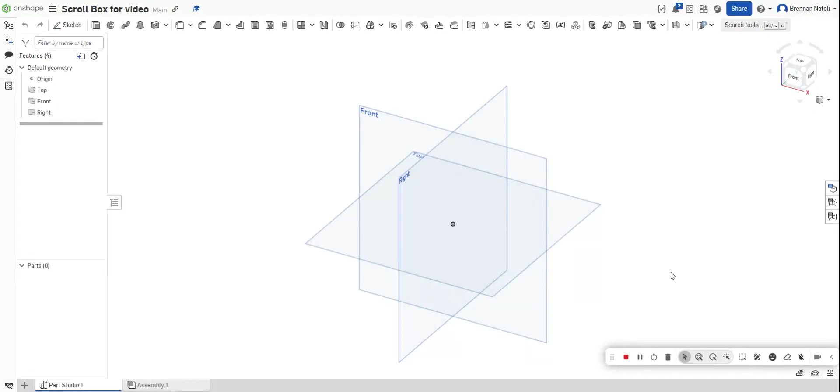So if we go into our Part Studio, here. I'm going to click Top View, N on my keyboard to create a normal view, so I'm looking directly on that. And remember, I don't have to keep everything in this blue space, this goes on for infinity. I'm going to create a sketch, so I click Sketch. What plane? I'm going to click the top plane.

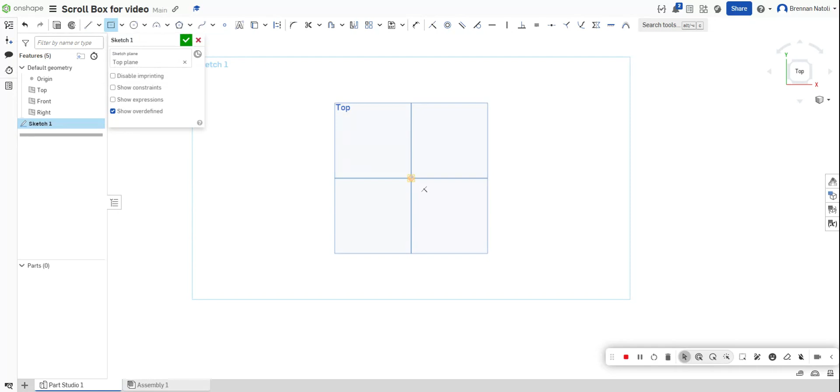Now I'm going to use the rectangle. When you click rectangle, make sure it's a center point rectangle. We're going to draw off the center, it's just easier to do that. So I click center point rectangle. Now if I click the center, drag up, click once.

I don't have to hover over these numbers. You see here where it says 6.47, it's a white box because it's asking you to input numbers. You don't have to click that. So what that's asking is for that measurement, and the measurement is 4.75. So I type in that, click enter, and then up here, if this box is white, it's asking me to put in 4.75 again.

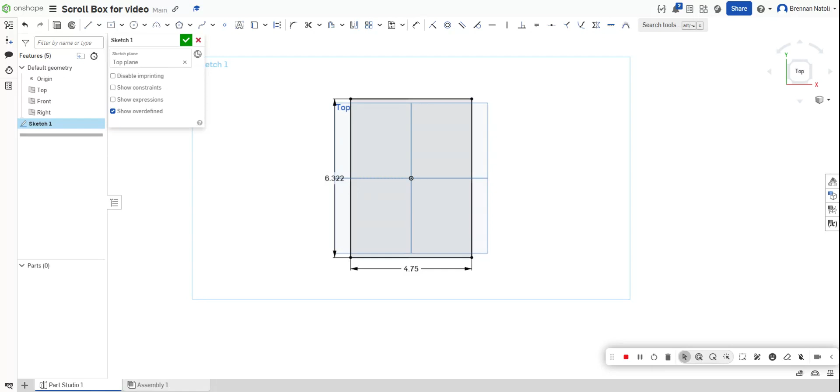Now, if you accidentally hit enter, not the end of the world. Just see my cursor still has that crosshair. Hit escape on your keyboard to break that. So you have a normal white cursor, and you can click that, double click it, and you can manually change that to 4.75, because if I'm referencing my drawing here, this is 4 3/4 by 4 3/4.

So 4 3/4 wide by 4 3/4 wide. Great. The next thing you want to create is that radius. So if I look at my drawing, we have a radius, inside radius, which we'll worry about after, but an outside radius as well, both 1/2 inch.

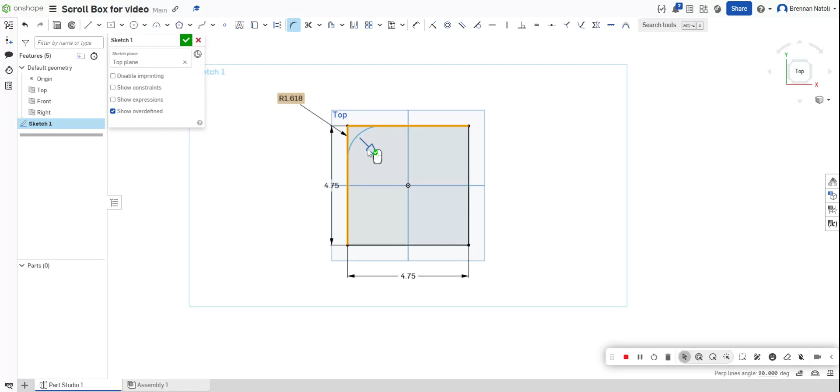Easy enough, I click the radius. It's not called radius, it's called a fillet. If you can't find it, you can type it in the search bar, but fillet, sketch fillet, I click that once, and you'll see I can click the two corners I want to add the fillet to. I can manually drag it out, but what I do is I just click it again, and then I can tell it what radius I want this to be. I want this to be 1/2 inch.

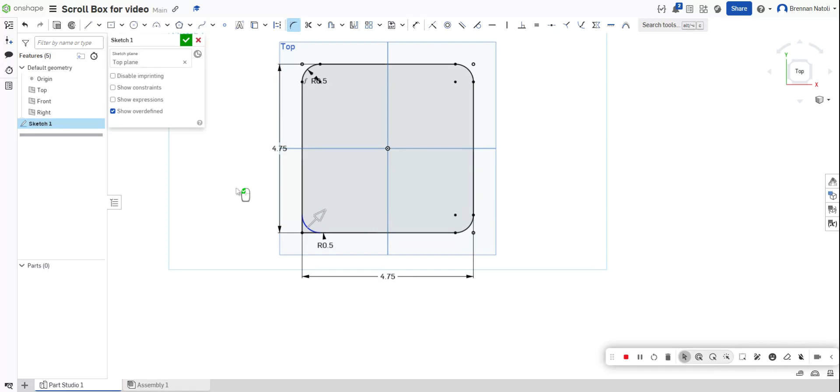Great. Once I have one selected, all I need to do, I'm still in this command, I'm just going to click the other corners. The radius is already set at 0.5. Click again, hit enter, and I can go around and I have the outside.

Now if you look at our drawing, we have this inside cut out, right? So we need what's called an offset. So we're going to offset this outside profile by 3/8 of an inch. You see that this dimension here that I'm highlighting is the wall, it's 3/8 of an inch. So we don't have to redraw this.

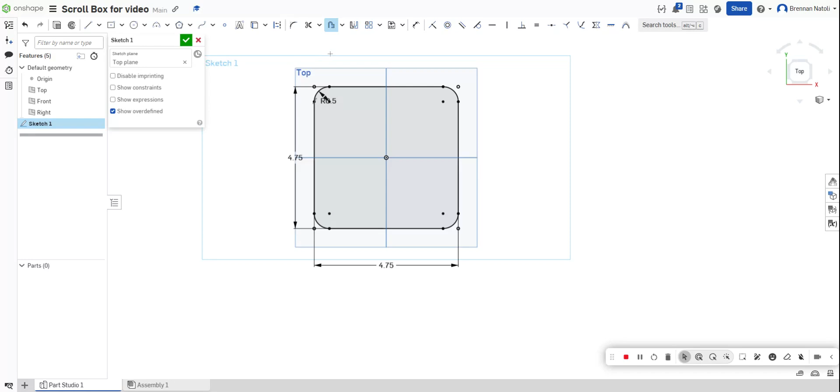We could, but what's easier, if you're still in the sketch, there's a tool up here called offset. If you click offset, what this will allow you to do is click all the lines. You can see as I click, I'm clicking all the lines that I want to offset. And the arrow, it's pointing 0.25 inches outside, but we want to click that arrow once, we'll change the direction. You see it's asking to accept that, I accept that once, and now what I'll do is come back, hit escape to break the cursor.

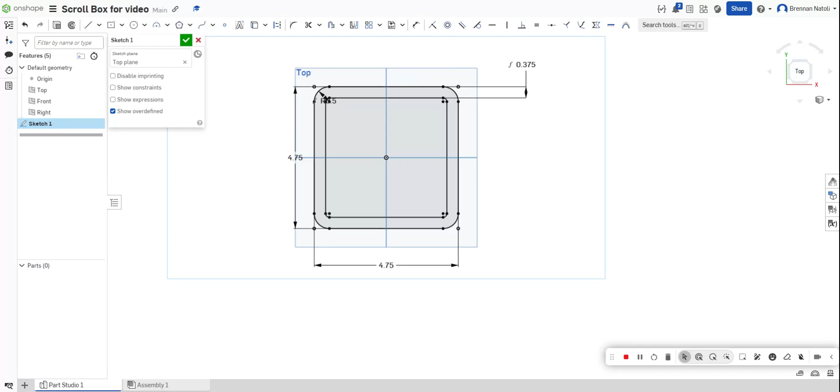If I click this dimension here, 0.25, we're going to change that to 3/8. And you see my offset changed.

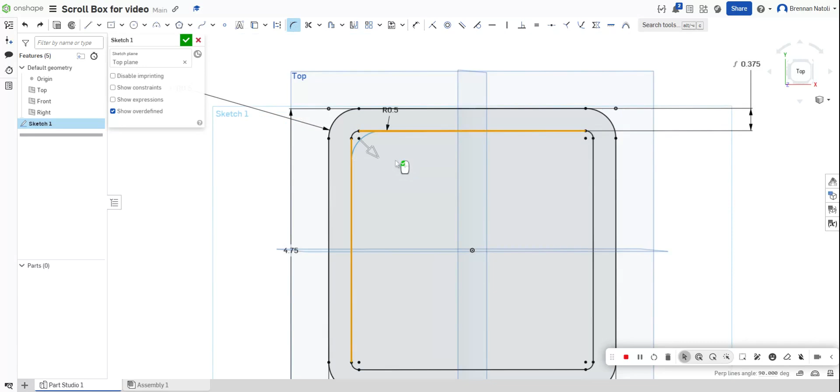After you do that, you notice the radius doesn't always transfer perfectly, so you'll have to manually change this radius. Go up to sketch fillet again, click the lines you want to add the radius to, accept it, go around all the corners again, and you'll notice it leaves that extra line there.

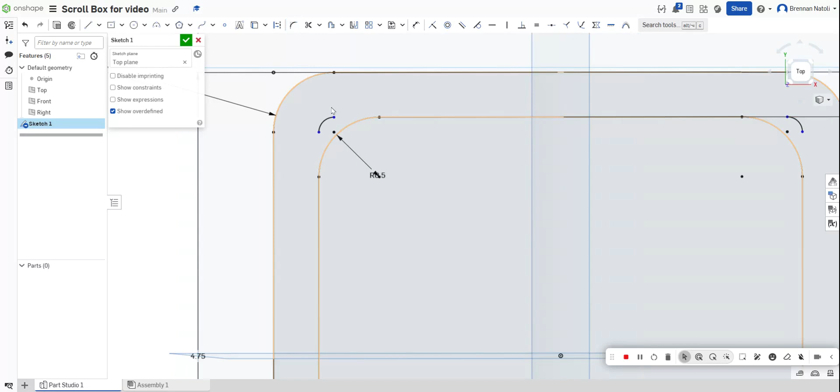Remember, to get to the normal cursor, your cursor shouldn't look like these crosshairs. To break the command, hit escape on your keyboard. Your cursor should look like this, and what you can do is go back and delete those extra radius lines. Great, we now have our sketch.

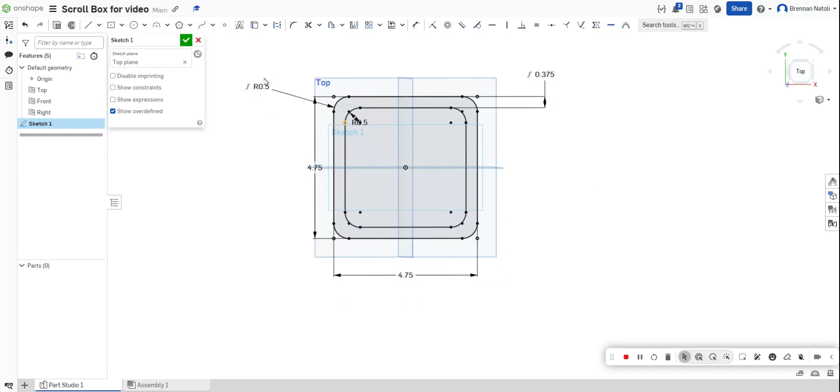So basically we just created, if you look at our drawing, this top view here, referencing all these. Now we need to extrude this, since it's still only 2D, to make it 3D. So I'll name this sketch, body, accept it. If I rotate around, you'll see it's still not complete. So what you do is click extrude.

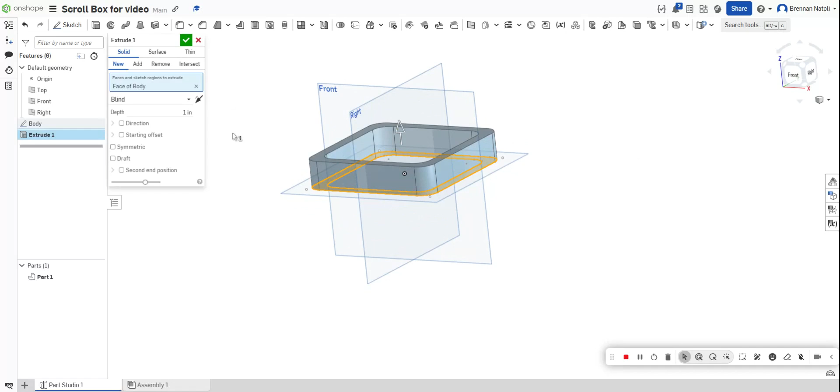Now all I need to extrude is I'm going to select the outside and the depth. If I reference my drawing, what's the depth? It's 1.5 inches, so I'm referencing my drawing. 1.5. I'm going to name it - it's good to name the extrusion. So this is body. Green check mark, and great, I have the body of this.

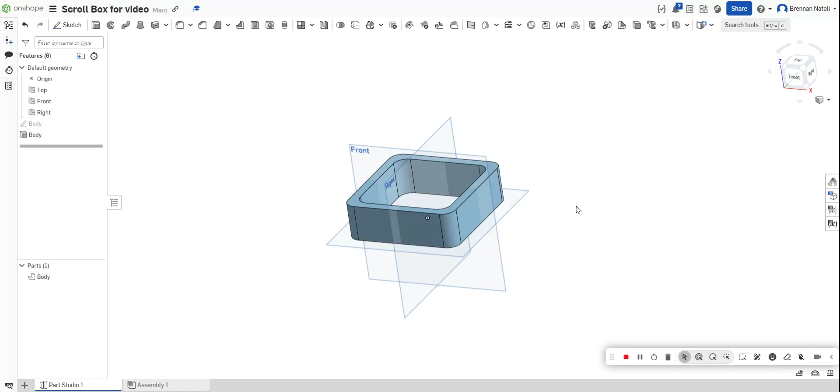Now from this, we can work and build off of this. It's pretty straightforward - we're going to reference the other drawings and build off of this first part. You can see now that we have a sketch, an extrusion, down here where it says parts, we have part 1. We'll rename this body. And that's our initial part. Great. From here, we're going to start and draw our top.

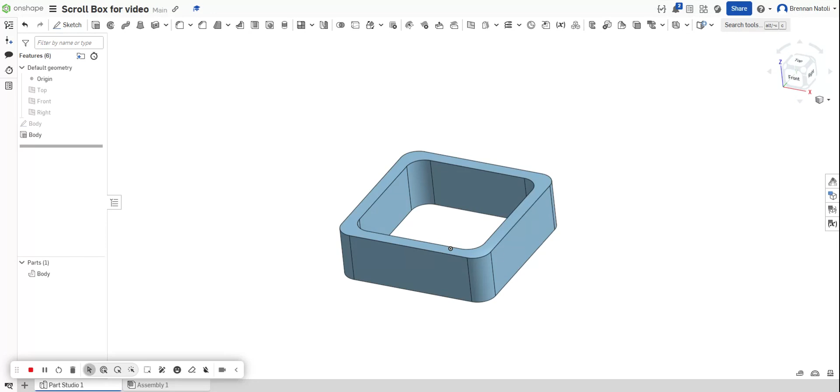So we'll go here, we'll start a new sketch. I'm going to click this surface here, the top of the body of the box. Click N on my keyboard, so I'm looking directly on the top. And then I will click Sketch.

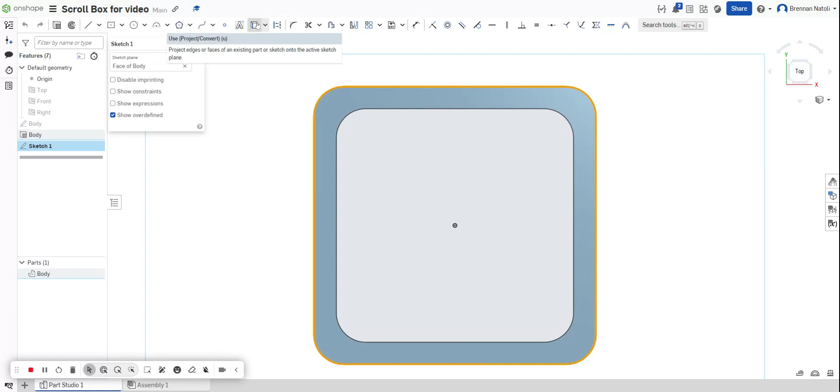So we're going to use a new tool here, called the Use and Offset tool. The first thing we're going to do is the Use tool - it looks like a square with one side highlighted blue. This allows you to click the outside perimeter, so we're not going to draw a new square. We're going to click the lines, and they'll be selected when they turn orange. Then I'll click the Use/project/convert icon, and you'll see those turn black.

If I hide, now what you can do, you can hide your body. Over here on the left-hand side where my cursor is blinking, there's a little eye icon if you hover over it. If you click that, it will hide the body. So now you can just reference your sketch that you're drawing now.

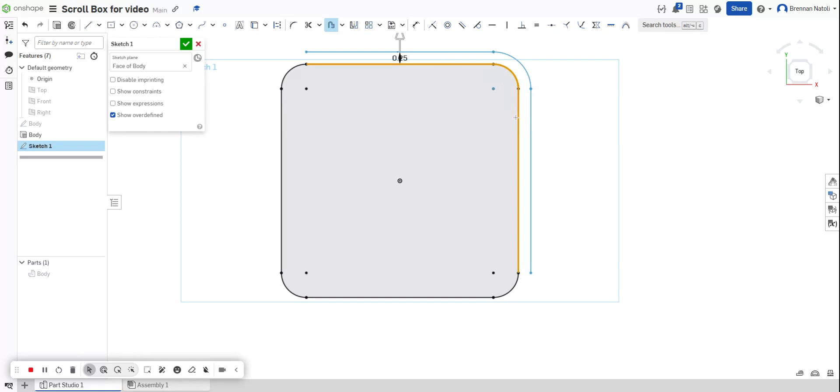That's great. If you reference our drawing, we have this rectangle on the inside, right? That is 7/16 from the outside, so we're going to use the offset tool. There's an icon here called offset, or O on your keyboard. If you select this, you should be able to click each of these lines, and you'll see as I select, lines will build around this.

And we want to change the direction - we want to offset inside, so I'm going to just move the arrow in. If I move my cursor, you see how it has that green check mark next to the left click, so I'll click. That gets accepted, but we want to change this number here, so make sure my cursor is still in the offset command because I have the crosshairs. So hit escape on your keyboard.

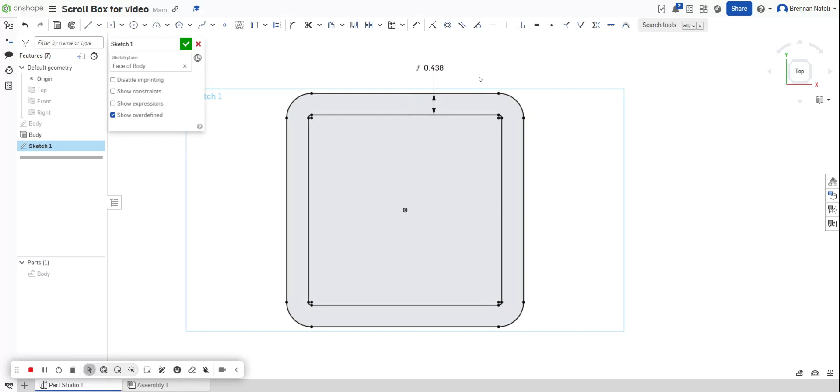Now this dimension here, if I double click this, we're going to change this to 7/16 and hit enter. Great, it looks good. The only thing we need to change is the radius.

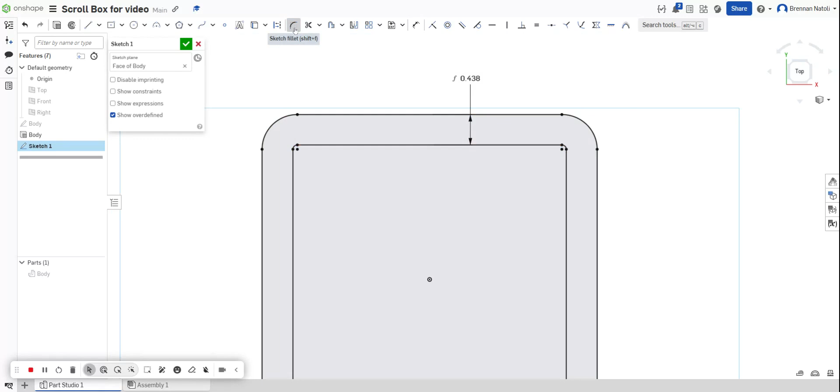So what we're going to do is use the fillet command - this is going to give that a radius. I'm going to click the fillet command, Shift F on your keyboard, and click each of the corners and click once. Mine is already set to 0.5 - if yours is not, change this dimension to 0.5. You're going to go around, I'm still in the fillet command, my cursor has the crosshairs, it's still selected blue up at the toolbar, and I'll go around and make all these corners have a radius of 1/2 inch.

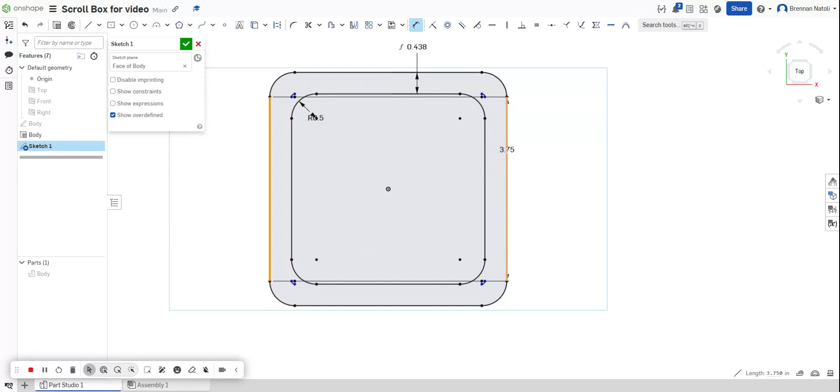So there's our sketch, right? We just made it, we can dimension this - we don't need to dimension this because you see the lines are black, that means they're fully defined. So if I try to, nothing will happen. It's referencing the body that we drew before, but this looks just like the drawing here.

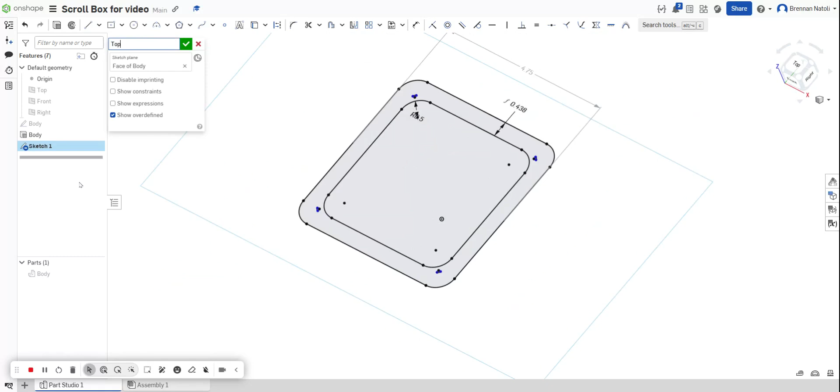So now we need to extrude this and make it 3-dimensional. I'll name the sketch top. It's important to name everything, every sketch, every extrusion. So there is that. If I go back over to the parts and show the body, you can see we drew that sketch right on top here. I'll hide this again.

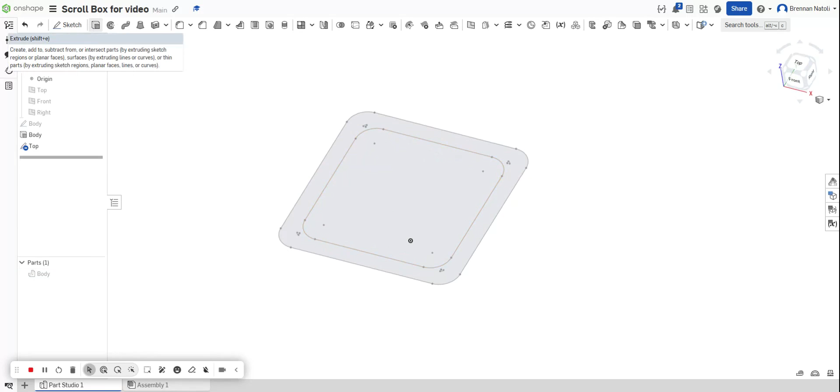So the first thing we're going to do is extrude the middle section. I'll click the extrude button, click the center, and you want to change the direction. We're going to extrude that down and change the depth to 0.25, a quarter inch. You can type in fractions or decimals. And that's a new part.

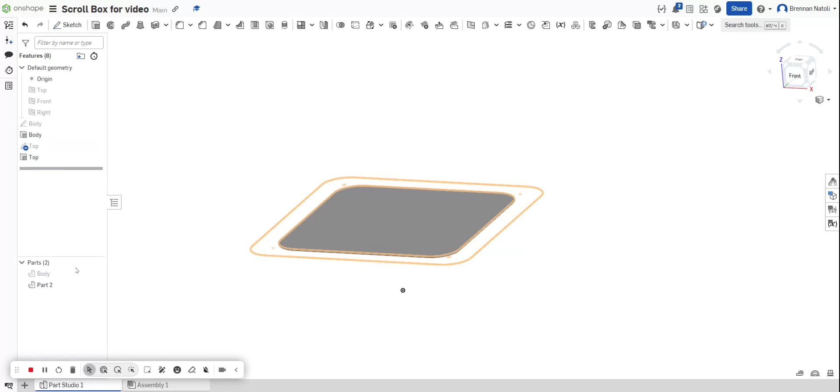So we're going to change that from extrude 1 to top, 0.25. Okay, so great, we have that part. That's the inside lip, right? We need to make the rest of that.

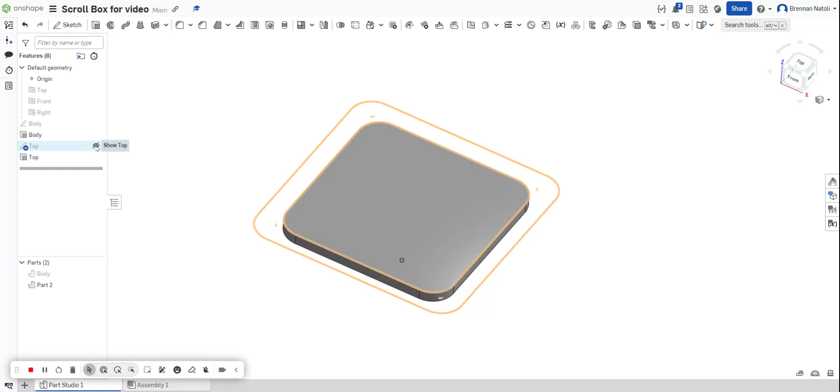So we're going to use the extrude tool again. Before we click that, we're going to go over down on the left where it shows our sketch, our top sketch. If you hover over it, click the eye icon so you can see the sketch. And we're going to click a few things.

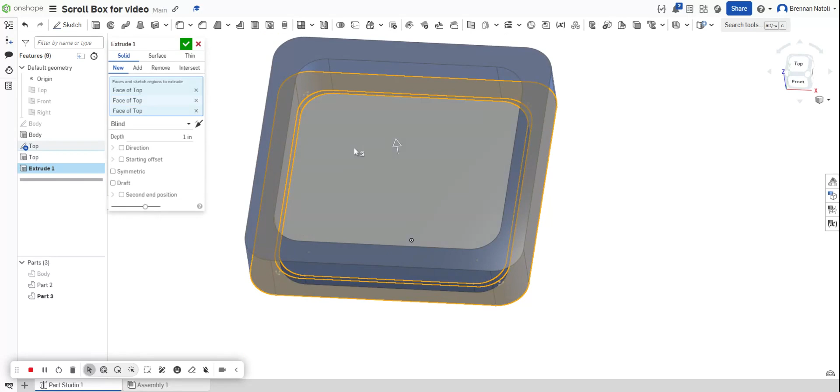The first thing we're going to do is click extrude, and there should be a little perimeter on the inside. You're going to select that carefully, and select the outside as well. Then you're going to select the inside again, which you just did. So it looks like this big block here if you rotate around. But the depth on this should be 0.25.

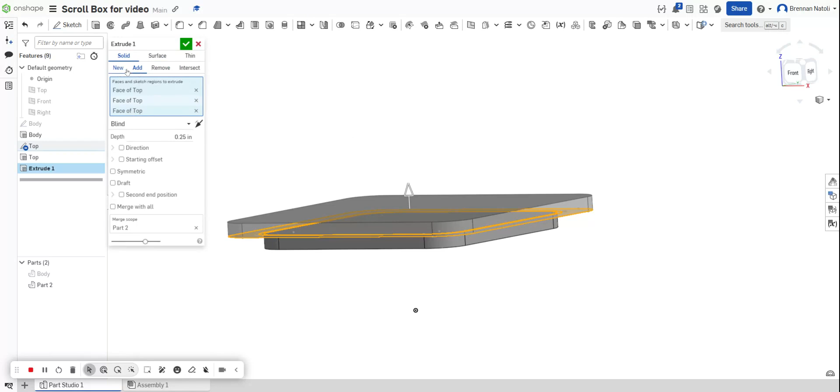You click that, and you want to make sure a couple key things. Make sure here where it says extrude 1, new add, you're adding this. It should automatically add. If it doesn't, it might show red. You want to go down here where it says merge scope. Click merge scope and make sure you're selecting over here where it says parts, part 2. That will merge it with that part, basically blending it with the part you already drew. So now this becomes one.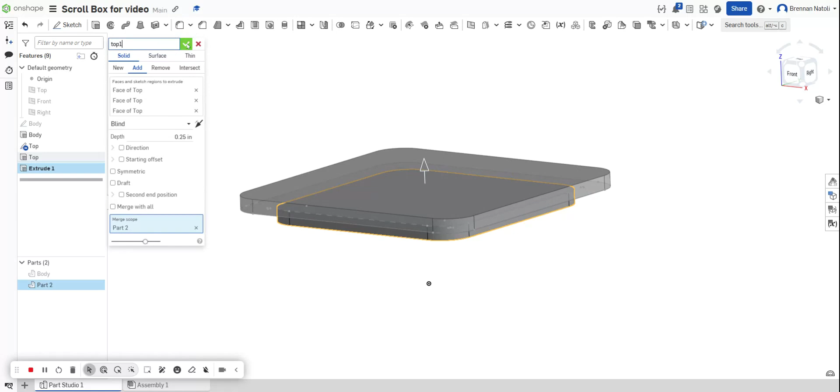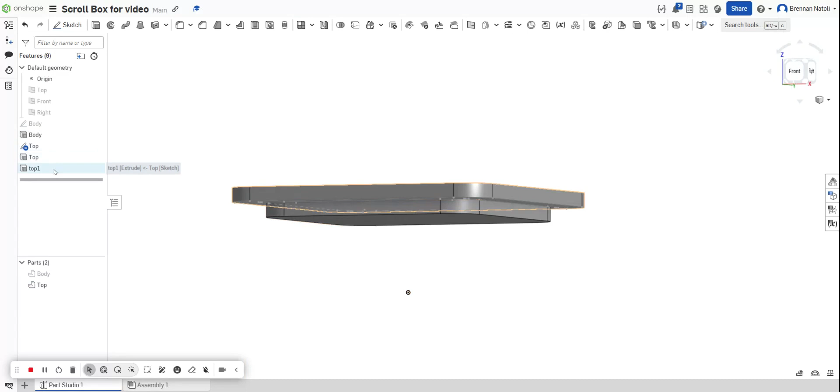So now what I'll do is type top, top 1, green check mark, and you can now see I have a new part down here, part 2. So I'll rename this top. Now we should have in our feature tree our body sketch, our body extrusion, our top sketch, and our 2 top extrusions, which made these parts. So if you look at this, we have our top, our body, and now we just need to make the bottom.

So the bottom is really straightforward. It's the same process, right? I have the drawing that you can reference, but you really don't need to. If you look at the bottom drawing, it's the same exact thing as the top. The only difference is it doesn't have that inner lid or lip, and it's a 4 and 3/4 inch square, a 1/2 inch radius, with a 1/4 inch thickness.

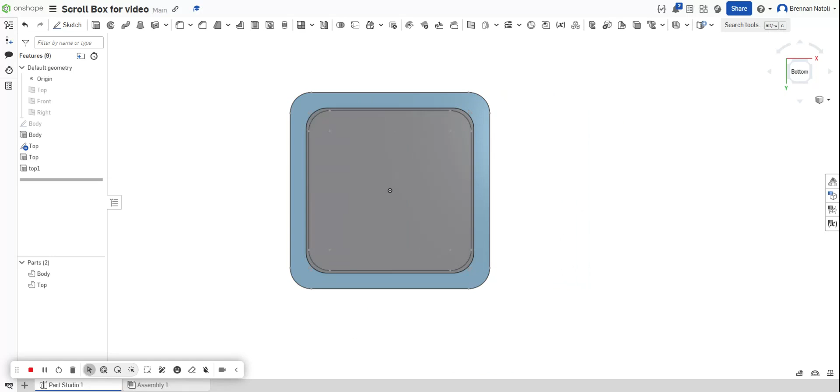So you're going to rotate around to the bottom, click on the surface, click sketch, and just like before I'm going to use the use command. Click that, and I'm going to select the lines I want to reuse. So it's the outer perimeter of the square. I'll name the sketch bottom.

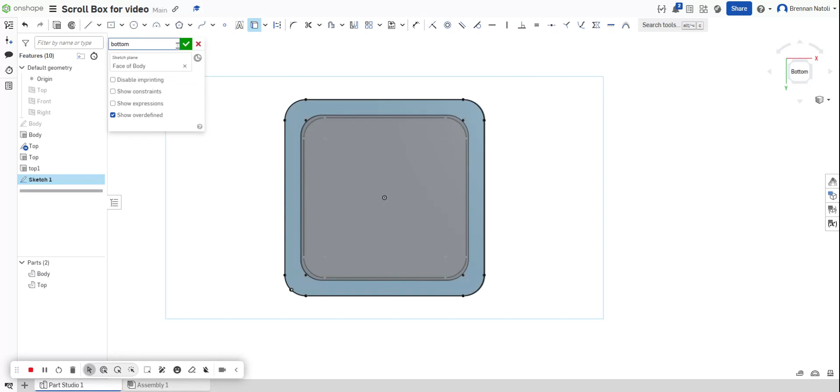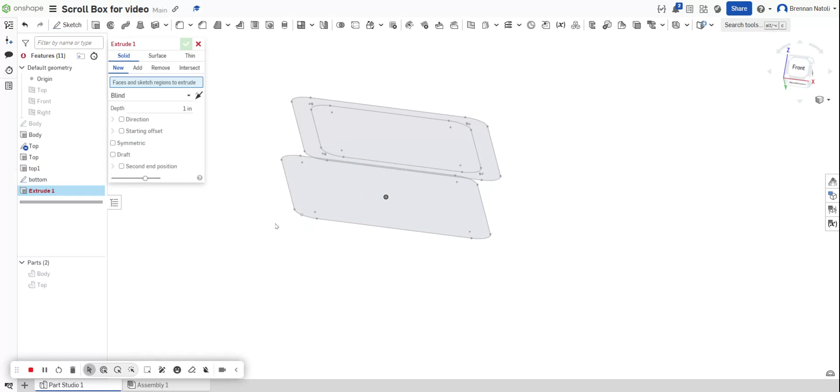Now when I click extrude, I'm going to hide the body and the top, and you're going to see all your sketches. If that gets confusing, you can go over to your feature tree and hide your other sketches. But you just want to select the bottom. When you select it, it might not select the entire square itself, so you might need to click the inside as well, so you create that whole solid piece.

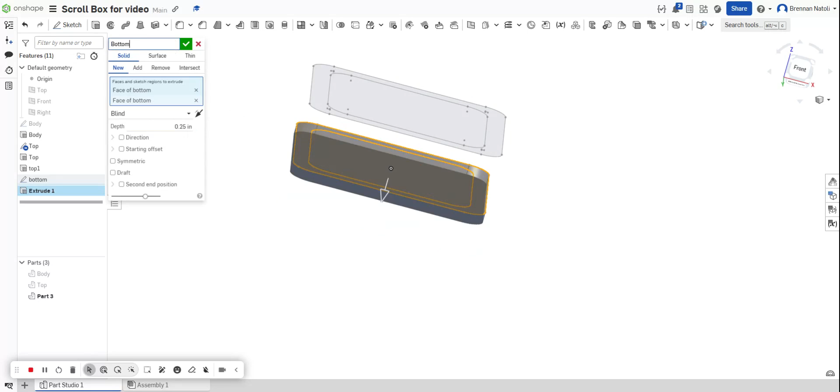And again, the depth with this is 0.25, or a quarter inch, and we'll label that extrusion bottom. So you have here your 3 parts, and I'll name this over here where it says parts. You show your body, your top, and now part 3, which we can rename and call the bottom.

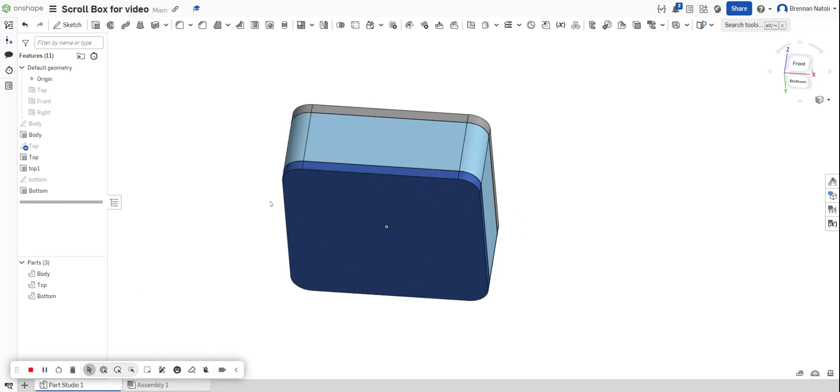So if we show all these, we have our completed box. So we have our top, bottom, and then our body. And like I said, over here you can hide these parts. So if you want to just see the top, if you want to see the bottom, hide the bottom, just see the top, hide the top, just see the body.

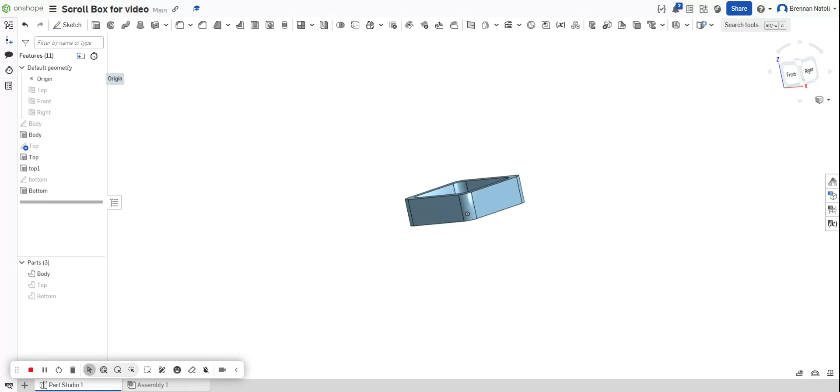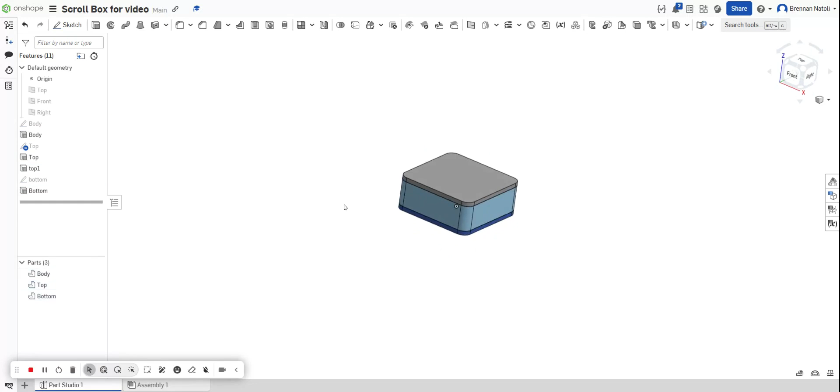You'll have, now you should, for a completed project, you need to have all these parts. You'll have all these sketches and extrusions labeled. So you'll have your body sketch, your body extrusion, your top sketch, your 2 top extrusions, your bottom sketch, your bottom extrusion, and then you'll have your 3 parts: body, top, and bottom. And that would complete your Onshape for this scroll saw box project.